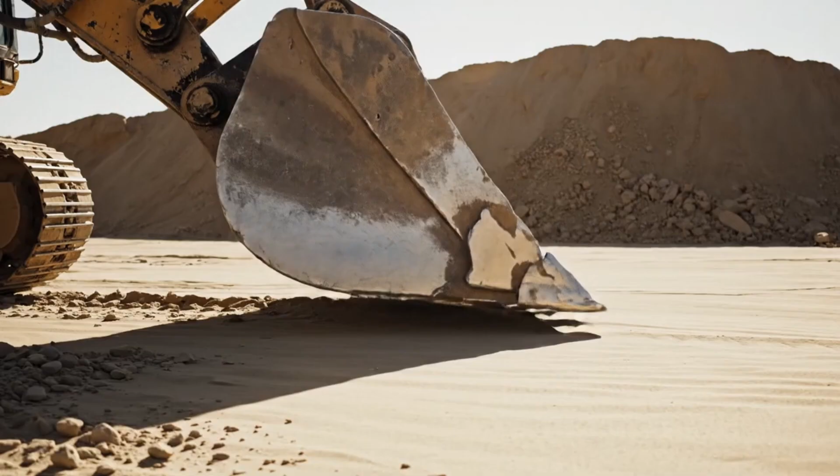There is not just one option. Engineers and geopolitical analysts have debated for decades what the ideal route would be. The most direct option would begin in the northern Persian Gulf, on the coast of Kuwait or Iraq, cross the Arabian Peninsula from north to south, and terminate in the Gulf of Oman or directly in the Indian Ocean.

The distance is staggering. Depending on the exact route, it ranges from 800 to 1,000 kilometers in a straight line through the desert. For comparison, the Suez Canal is 193 kilometers long and the Panama Canal is 82 kilometers. This canal would be 4 to 6 times longer than the Suez Canal, the largest artificial canal in history, by an absurd margin. But distance is not the only obstacle.

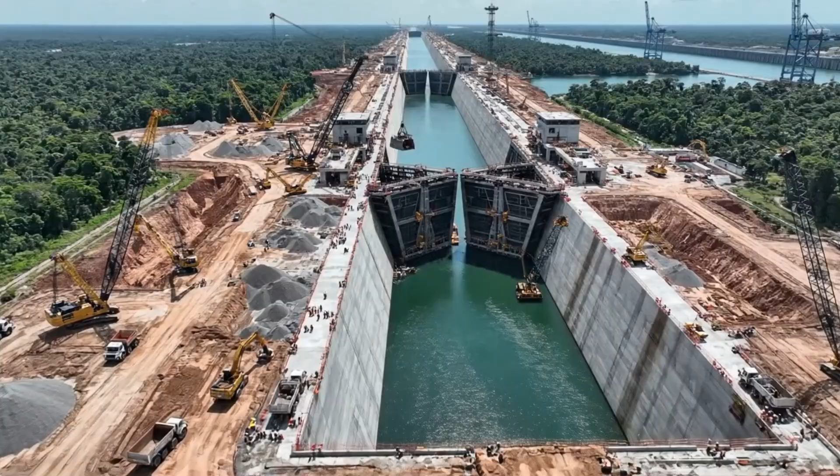The second problem, and perhaps the most complicated, is that a canal needs water, not only for the initial filling, but also to maintain the level, compensate for evaporation, and operate the locks. The Persian Gulf and the Indian Ocean are at different levels. The average difference is about 1.5 meters, though it varies with the tides and the seasons. This means the canal cannot simply be a trench cut from one point to another. It requires locks, controlled water chambers that raise or lower ships between different sections of the canal at different elevations.

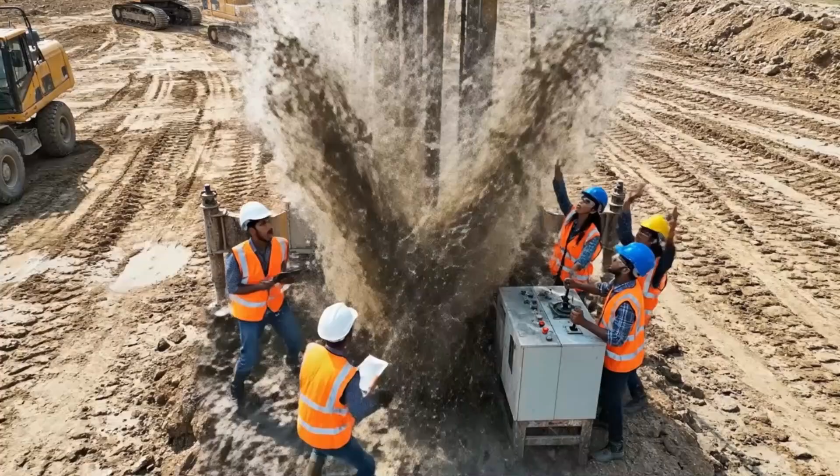And in a desert where temperatures can exceed 55 degrees Celsius, evaporation is devastating. A canal of this length, under these climatic conditions, would lose tens of millions of cubic meters of water annually to evaporation, water that would have to be constantly replenished in one of the driest places on Earth. The technical solution exists: desalination plants along the canal's route, combined with a gate system to minimize losses.

But each large-capacity desalination plant costs between $500 million and $2 billion, and dozens of them would be needed. The canal's water infrastructure alone would cost more than many complete engineering projects.

The dimensions. This is where the scale of the project becomes truly incomprehensible. For a VLCC-class supertanker to navigate fully loaded, the canal requires a minimum depth of 25 meters. The largest vessels, the ULCCs, require 28 meters. We would build for the largest, 28 meters of depth, without exception.

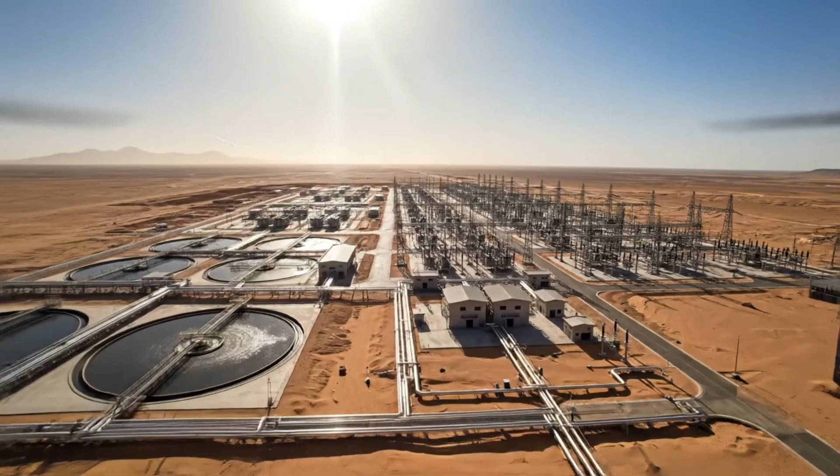Width. To ensure the safety of bidirectional supertanker traffic with vessels 60 meters wide, the canal must be at least 250 meters wide in its navigable section. Including the embankments, the total working area exceeds 400 meters in width, 28 meters deep, and 1,000 kilometers long.

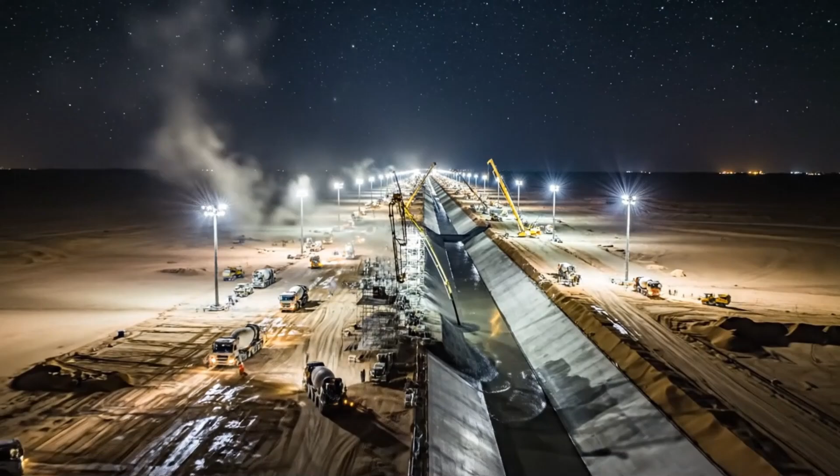The volume of material to be excavated is astronomical. To put this in perspective, the Panama Canal required the movement of 150 million cubic meters of earth, one of the greatest engineering projects in history. This canal would require the movement of between 15 and 20 billion cubic meters, 100 times more. If all that material were loaded onto construction trucks, the line of trucks would circle the earth 40 times.

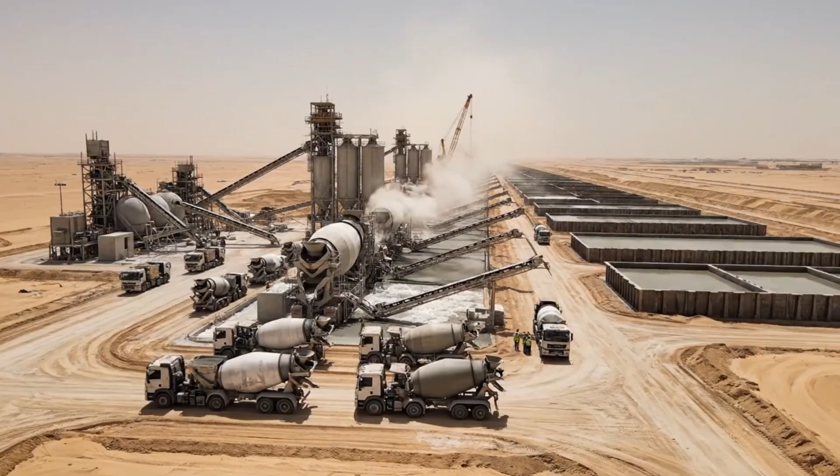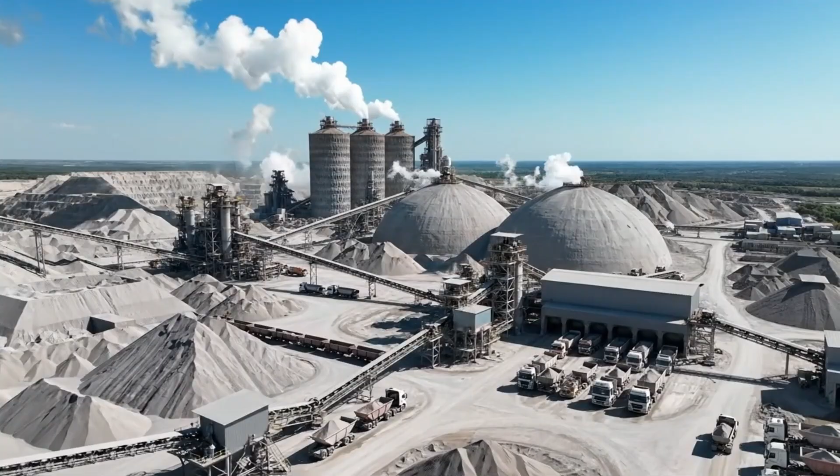The excavation. Never before in human history has anything of this scale been attempted, but engineers have tools that previous generations did not. Cutter suction dredgers are the giants that would handle the job in shallow waters, floating factory ships with a rotating cutting head at the bow that grinds the seabed and suctions the material up like an industrial vacuum cleaner. The largest dredgers in the world can dredge 100,000 cubic meters per day, but in the high elevation sections where the canal must cut through hard rock, dredgers are useless.

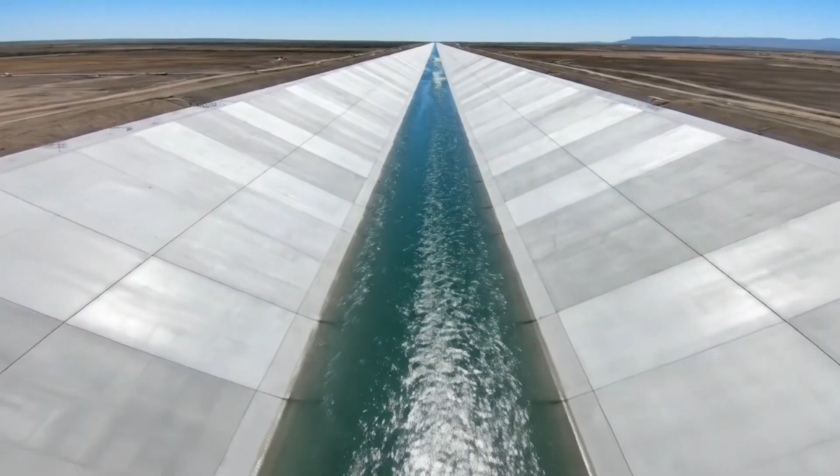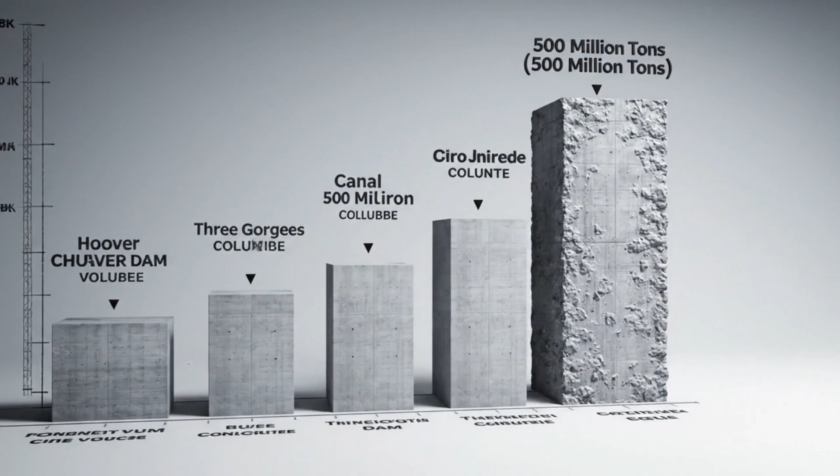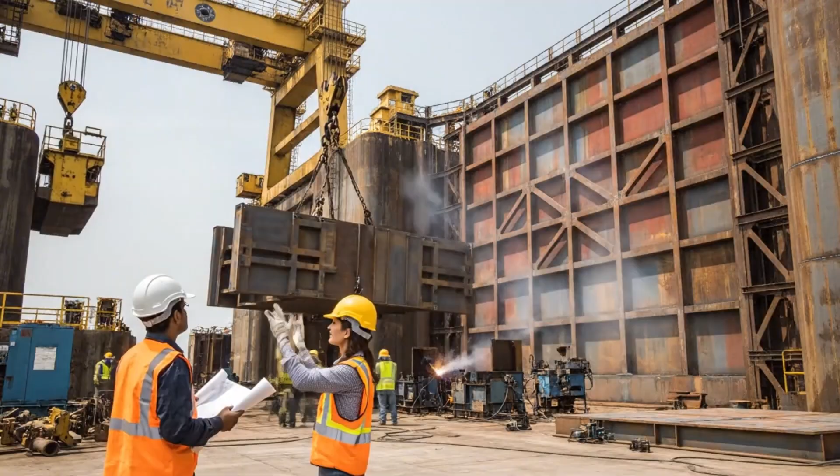That is where controlled explosives come in. Teams of explosives engineers drill into the rock following calculated patterns. They set charges of dynamite and ANFO and detonate entire sections of mountainside in coordinated operations. The scale of the detonations required is comparable only to open-pit mining. The largest copper mines in the world, in Chile and Peru, give some sense of what would be needed. But here, no ore is being extracted. The terrain is simply being cleared.

Then come the excavators. The largest ones, manufactured by Liebherr and Komatsu, are 800-ton machines with 40 cubic meter buckets, operating in coordinated fleets like armies of steel, carving their way through the desert.

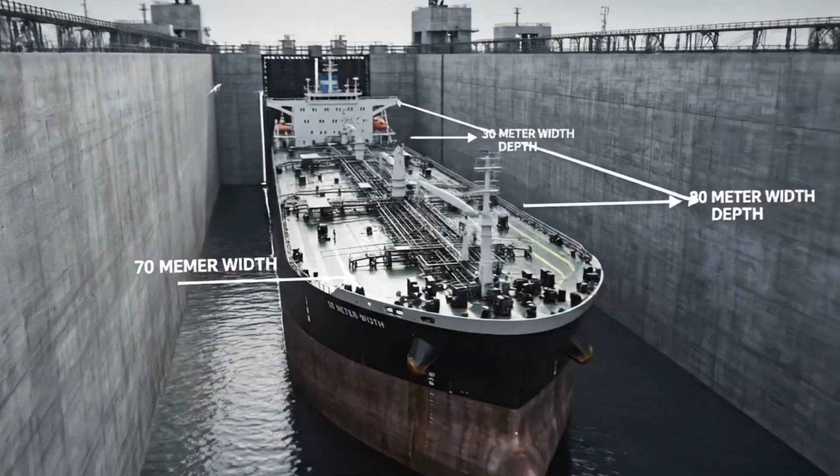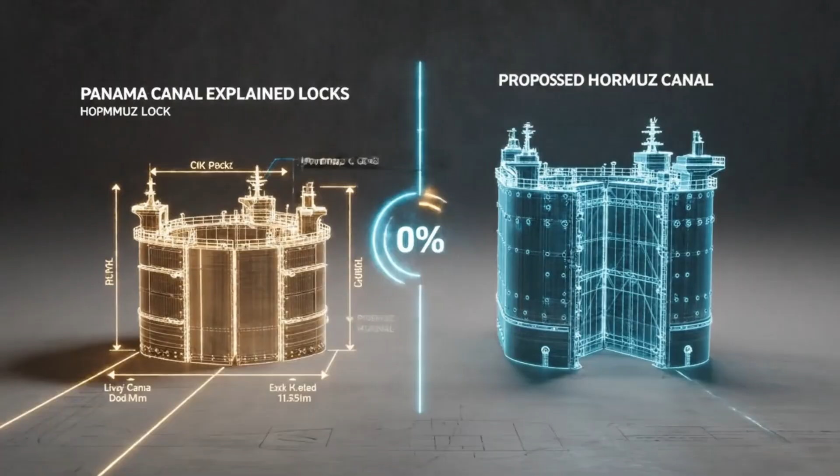The excavated material does not disappear. It has to go somewhere. In coastal areas, some of it could be used to create new land platforms at sea, similar to what was done in Dover with the Channel Tunnel, but on an infinitely larger scale. In inland areas, enormous spoil deposits of gigantic proportions would have to be created, new artificial hills rising in the middle of the desert.

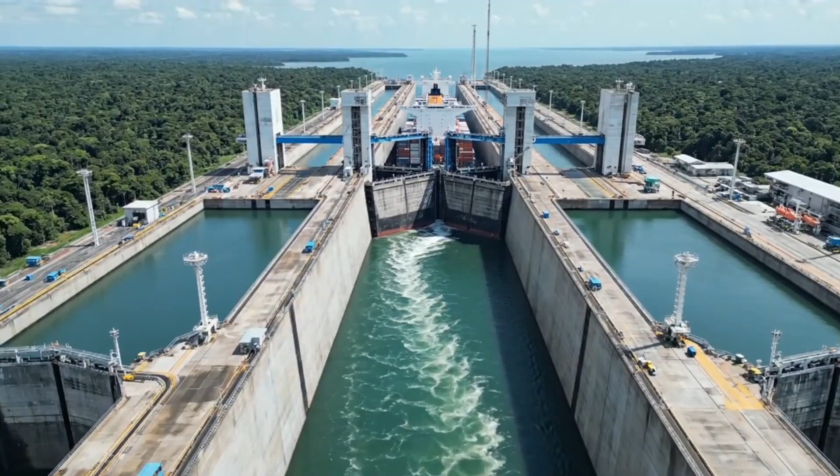The locks are the operational heart of the canal. Without them, nothing works. At least 6 lock complexes would be needed along the route, located at the points where the elevation difference between sections is greatest.

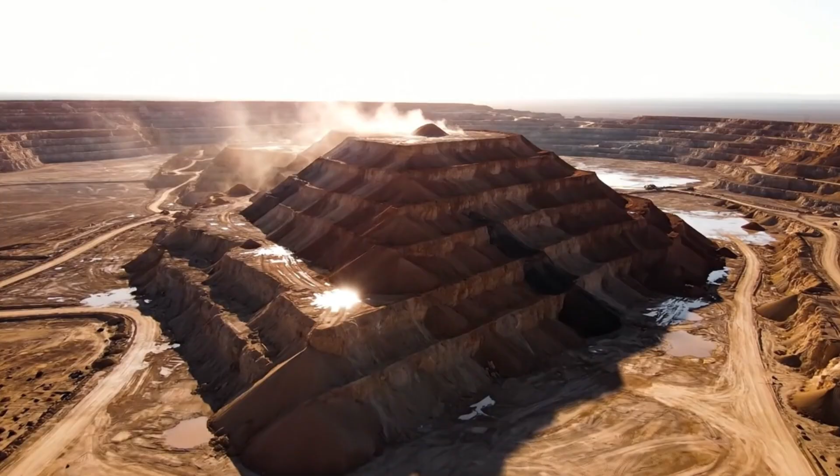Each lock complex is not just a structure, it is a city of concrete. The expanded Panama Canal locks, currently the largest in the world, have chambers 427 meters long, 55 meters wide, and 18.3 meters deep. Even so, the largest supertankers cannot pass through them.

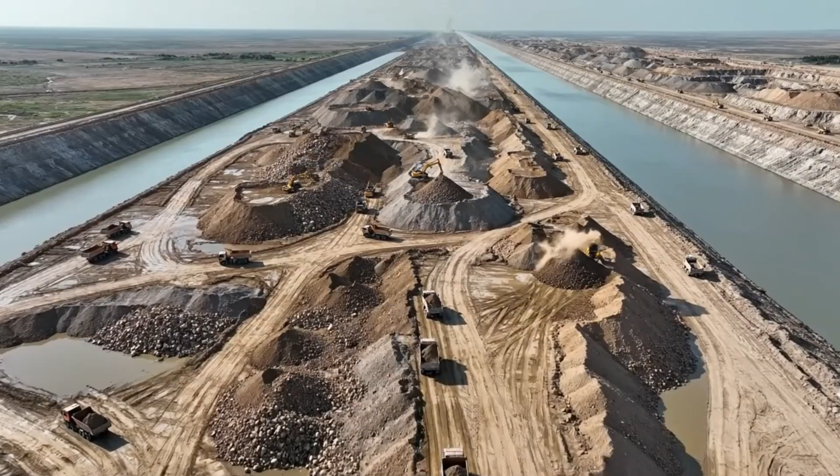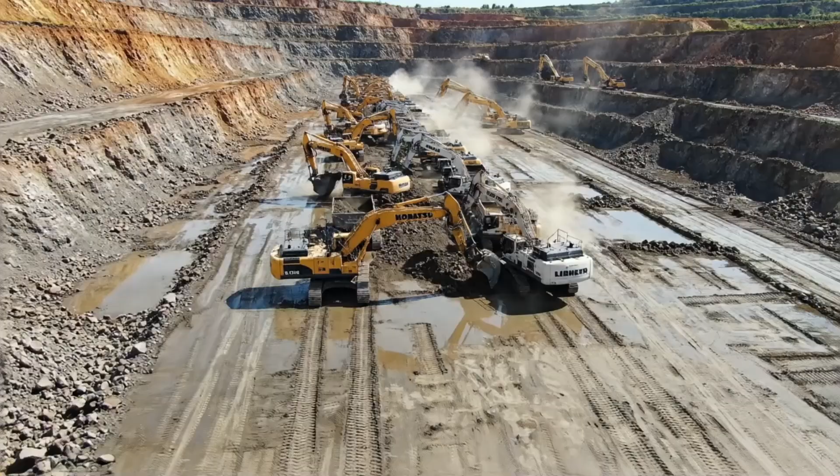The locks on this canal would have to be larger, at least 500 meters long, 70 meters wide, and 30 meters deep. The gates on each lock would weigh thousands of tons. They would be the largest movable structures ever built, and 6 complexes of this type would have to be erected in the middle of the desert, hundreds of kilometers from any port. The locks alone would represent decades of work for the world's largest construction companies.

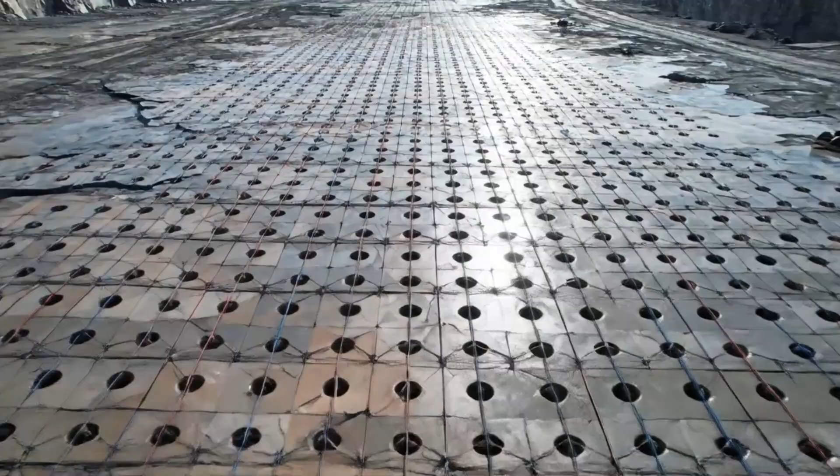And then there is the concrete. All of this requires concrete in unimaginable quantities. The project includes the lining of the canal, the locks, the dikes, the control structures, and the bridges that would cross it to connect communities separated by it. Estimates suggest the project would require more than 500 million tons of concrete.

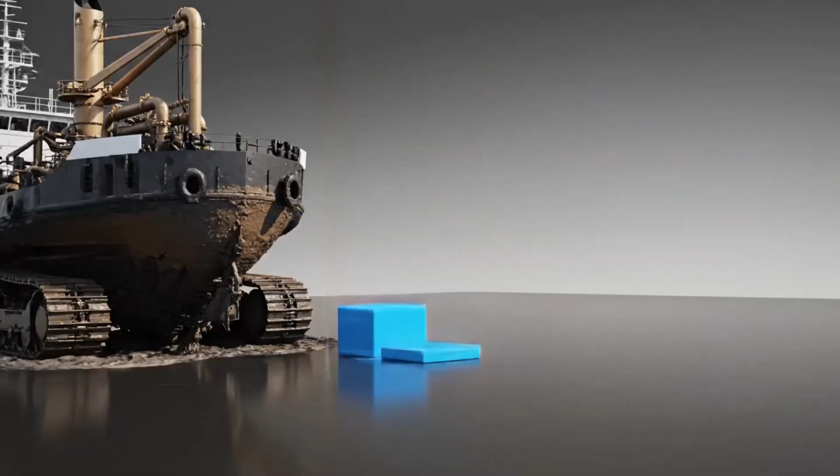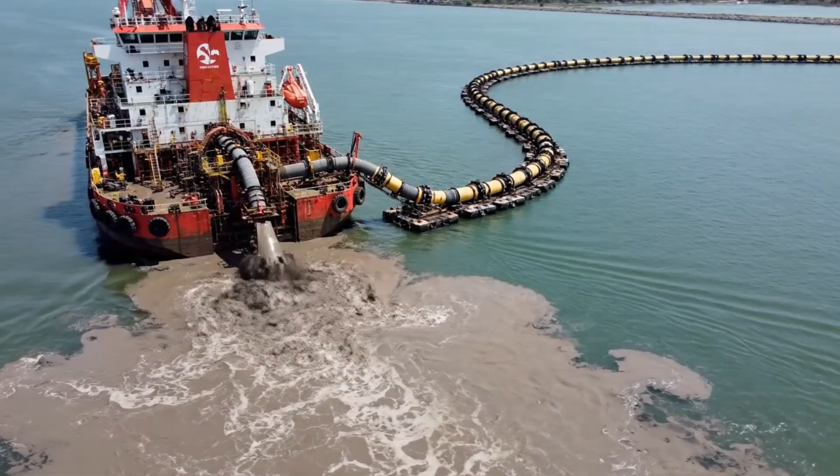To produce that quantity, dozens of cement factories would have to be built specifically for the project. Limestone, clay, and sand would have to be extracted in quantities that only industrial-scale mining can provide. And in the Arabian desert, where the heat causes concrete to harden far too quickly, the same techniques used on the Burj Khalifa would have to be employed: ice in the mix, nighttime pouring, admixtures, superplasticizers, but not for a single building, rather for thousands of kilometers of structures.

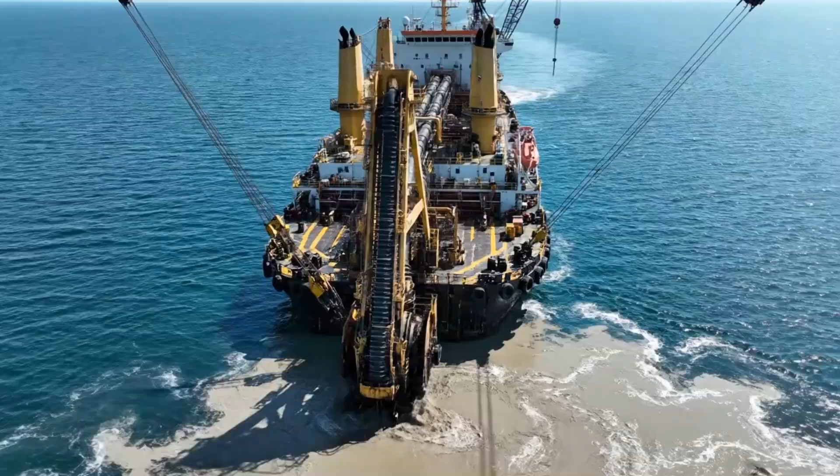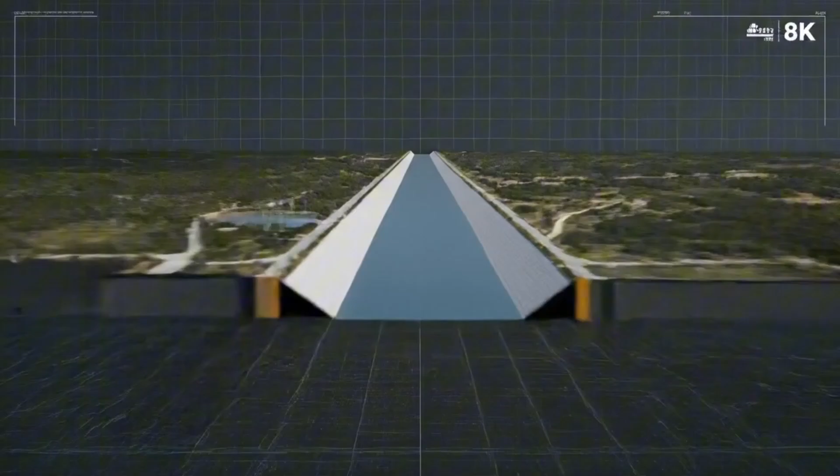Human logistics. A project of this magnitude cannot be completed with locally available labor. Estimates suggest that at peak construction, the canal would directly employ between 300,000 and 500,000 workers, with a similar number engaged in indirect activities such as materials production, transportation, food services, medical services, and security. 1 million people living and working in the desert.

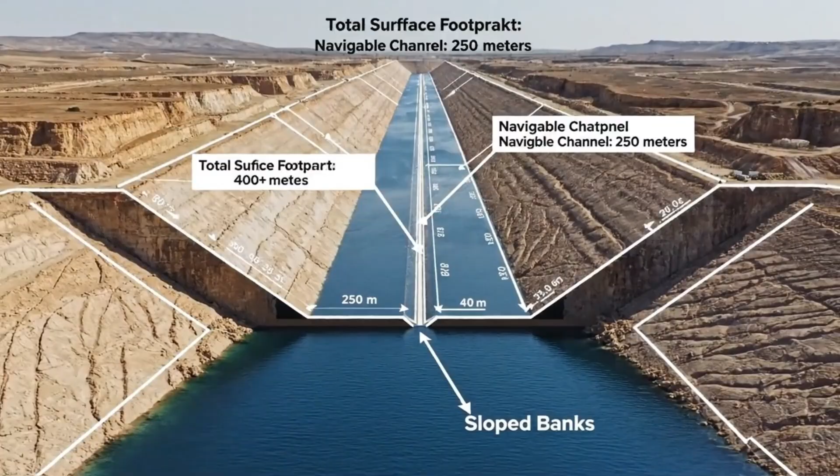Temporary cities, water and sanitation infrastructure, field hospitals, internal transportation systems, and electrical grids would all have to be built, all in an environment where summer temperatures exceed 50 degrees Celsius and sandstorms can last for days.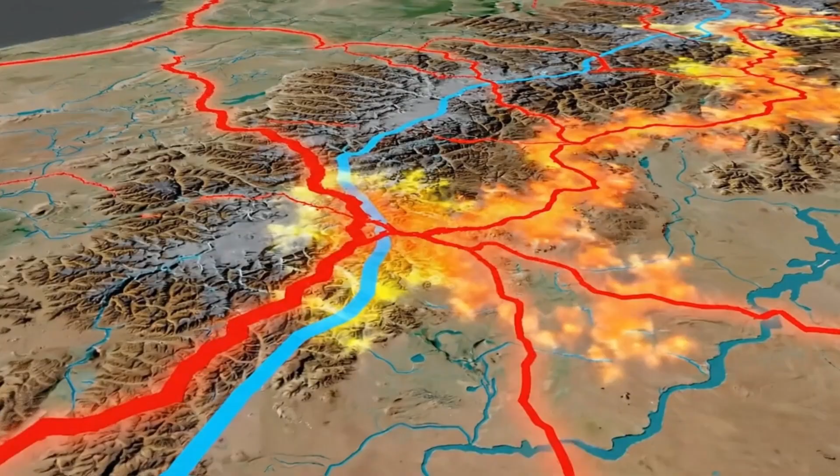The workers on the Burj Khalifa faced extreme conditions, with 12,000 people crowded onto a site of just a few hectares. Here, 500,000 people would be spread across 1,000 kilometers. The logistics alone would constitute one of the greatest challenges in the history of project management.

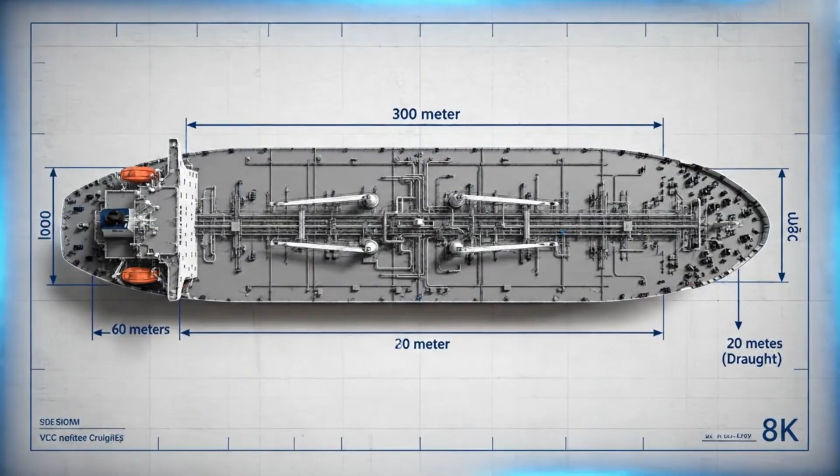And then there is the question of time. How long would it take to build? The Suez Canal took 10 years to build. The Panama Canal took 34 years from the first failed attempt to its definitive inauguration. With modern machinery, current techniques, uninterrupted funding, and firm political will, the most optimistic engineers speak of 25 to 30 years. The more realistic ones say 40.

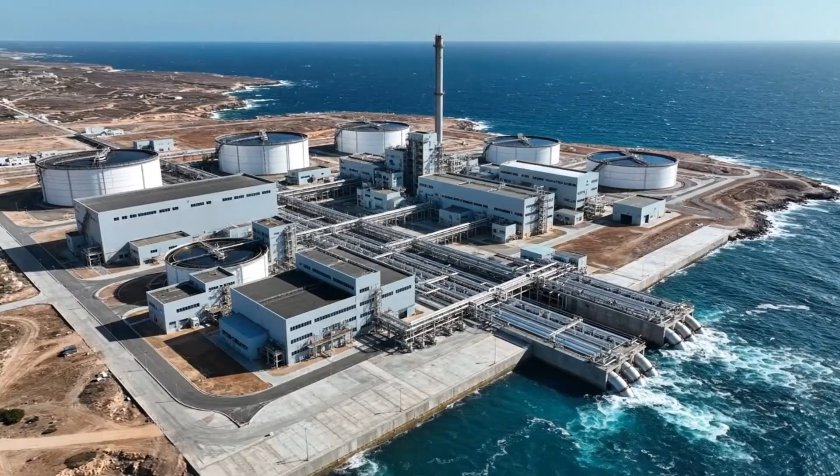And that assumes no wars, no economic crises, that the sand does not swallow the machinery, that the heat does not bring construction to a halt during the summer, that the geopolitical conflicts of the region do not disrupt the supply of materials, and that the underground aquifers crossed by the route do not generate unexpected flooding. Every single one of those risks is absolutely real in that region.

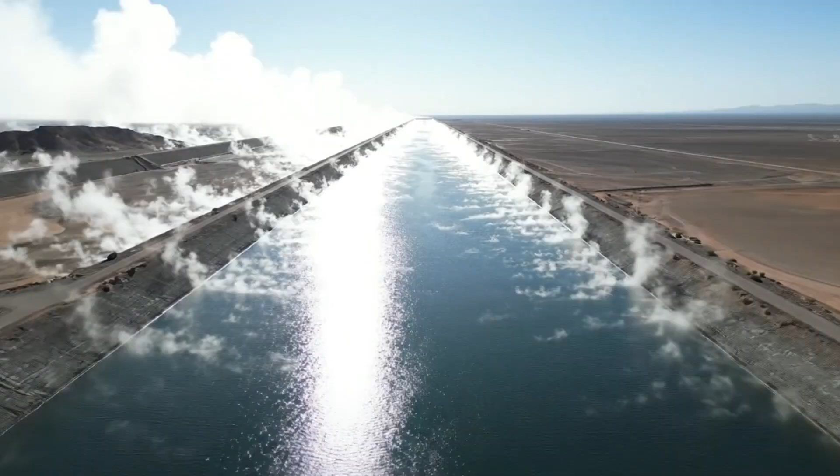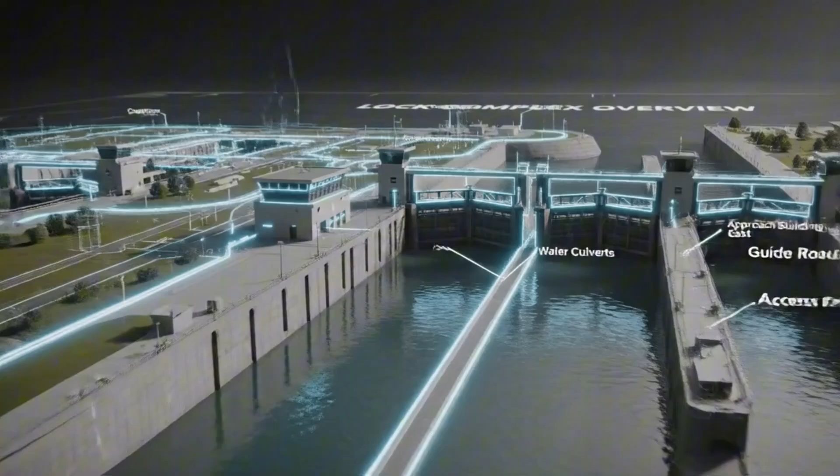The cost estimate of $200 billion is the most frequently cited figure, and it is almost certainly an underestimate. The expansion of the Panama Canal cost $5.25 billion. The Channel Tunnel cost twice its initial budget. California's high-speed rail project, which began with a budget of $33 billion, has already surpassed $100 billion in unfinished costs.

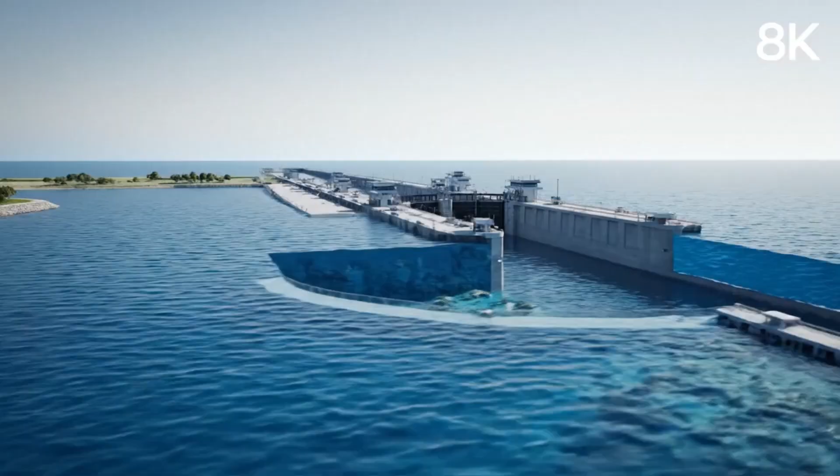Mega infrastructure projects systematically exceed their budgets. The historical average cost overrun for projects of this type ranges between 200 and 300%. If the Hormuz Canal follows that trend, the real cost could exceed $500 billion. $500 billion.

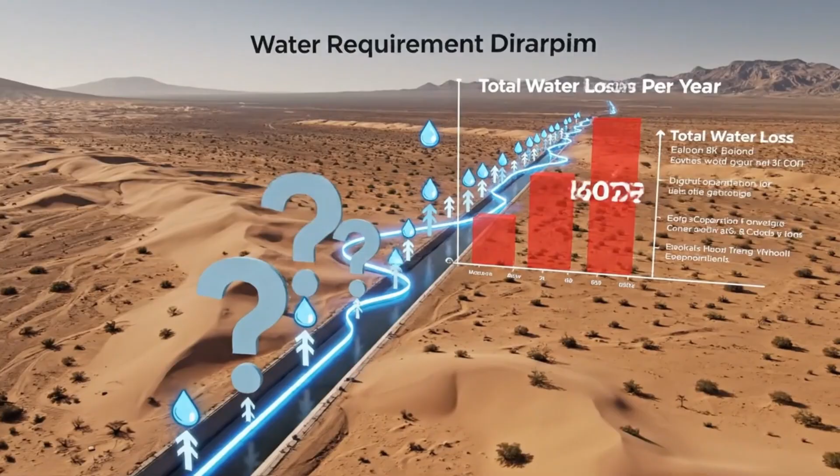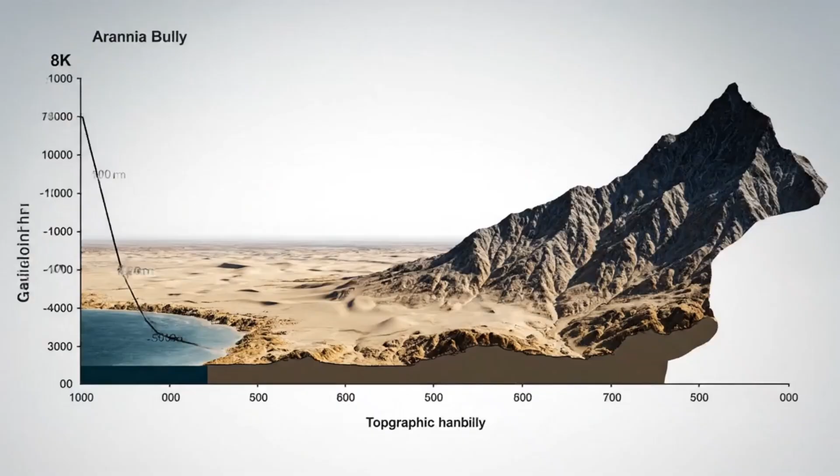To put that in context, Saudi Arabia, the wealthiest country in the region, has an annual GDP of approximately $1.1 trillion. The project would consume nearly half the kingdom's annual wealth, and it would still be worth every cent. The return. What justifies such an investment?

Every barrel of oil passing through the Strait of Hormuz is currently worth between $60 and $70, multiplied by 20 million barrels per day. The value of the daily flow exceeds $1.5 billion, adding up to more than $550 billion per year in oil and liquefied gas. A single year of closure of the Strait of Hormuz would cost the global economy more than the construction cost of the canal itself.

Furthermore, the canal would not only prevent closures, it would also reduce maritime insurance premiums, which spike during periods of crisis, lower the operating costs of supertanker fleets, create new trade routes along its length, and generate cities, ports, and industrial zones in territories that are currently completely uninhabited and inhospitable. The canal would not merely be a waterway. It would be the development axis of an entire region. Obstacles that no engineer can overcome.

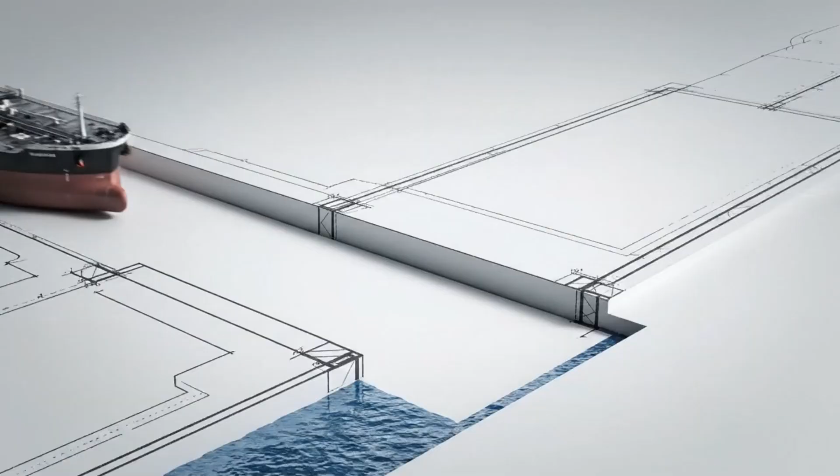Engineering has answers for almost all the technical problems of this project, but there are obstacles that cannot be solved with concrete and steel. The first is political. The canal would cross the sovereign territories of several countries: Saudi Arabia, Oman, possibly Yemen, possibly the United Arab Emirates, each with its own interests, its own conditions, its own border disputes. Reaching agreement among all of them on a 30-year project may be harder than building the canal itself.

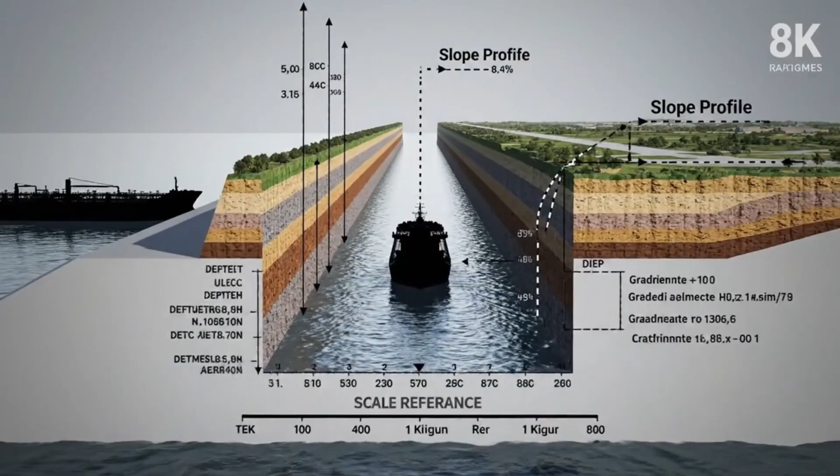The second is environmental. Connecting the Persian Gulf to the Indian Ocean through an artificial canal would create a corridor through which the marine ecosystems of both basins could intermingle. Invasive species would move in both directions. Temperature and salinity patterns would be altered, effects impossible to predict in full. The Suez Canal has already created this problem. Hundreds of marine species from the Red Sea have colonized the Mediterranean through the canal. This phenomenon is known as Lessepsian migration. A canal between the Persian Gulf and the Indian Ocean could create an equivalent or even greater problem.

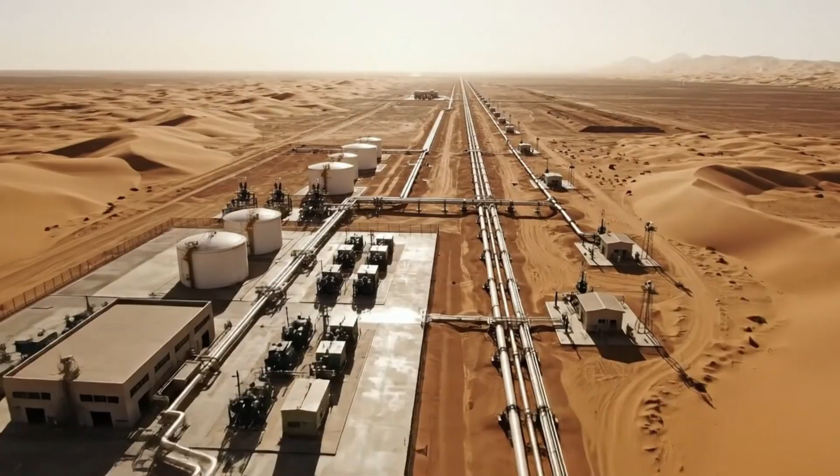The third issue is seismic. The Arabian Peninsula is not an area of high seismic activity, but it is not stable either. Active faults exist. There is residual volcanic activity in some areas. An earthquake of moderate magnitude along the route could damage entire sections of the canal lining.

Will it ever be built? Today, the project does not officially exist. No consortium of countries has approved it. No funding has been secured. No detailed engineering design has been produced.

But feasibility studies do exist. Preliminary plans have been drawn up. Diplomatic conversations have taken place in discreet meetings that never made headlines. And every time Iran threatens to close the Strait of Hormuz, the project returns to the desks of ministers and the boardrooms of the major oil companies.

Political will fluctuates. Urgency rises and falls with the geopolitical climate of the region. But the need is constant. The vulnerability of Hormuz does not disappear, is not negotiable, and cannot be permanently eliminated. And as long as that vulnerability exists, the most ambitious canal in human history will remain not merely an engineer's dream, but a strategic necessity that the world, sooner or later, will be forced to confront. On the day they begin to move the first grain of sand, nothing will ever be the same again.